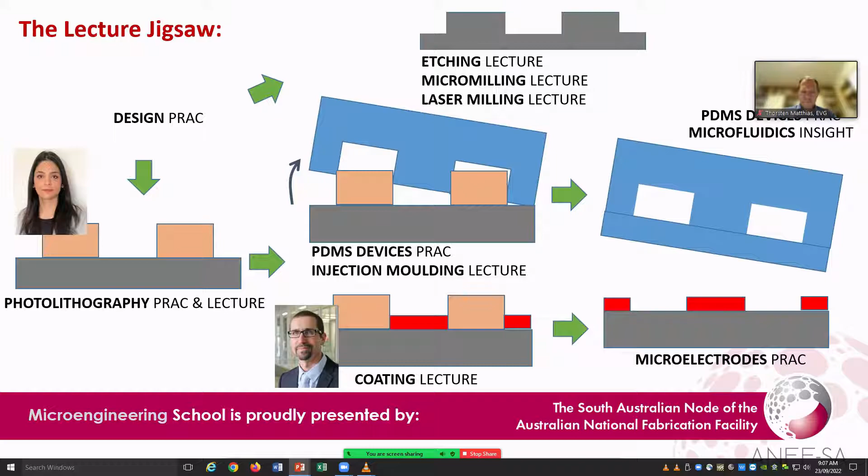Just to remind you of our little jigsaw here, you will have seen a few talks, and hopefully yesterday you took the time to dial in to watch the recordings that we've got. Colin has spoken to you about coating. We've had Mariam on photolithography, Donghoon on etching, Ben on laser milling. Now, micro milling you would have seen online, hopefully, a recording from Mark - some really nice work there. Please do check these out, these are fantastic, and Mike on injection moulding and moulding technology.

Then today, Coco and Berrak. So these are the lectures that you'll see, and of course the insights link all these things together in terms of devices. So by the end of this week you should have a rough idea what steps you could put together to make a small device. These are our volunteers - just thanking them all again, and back to the sponsors.

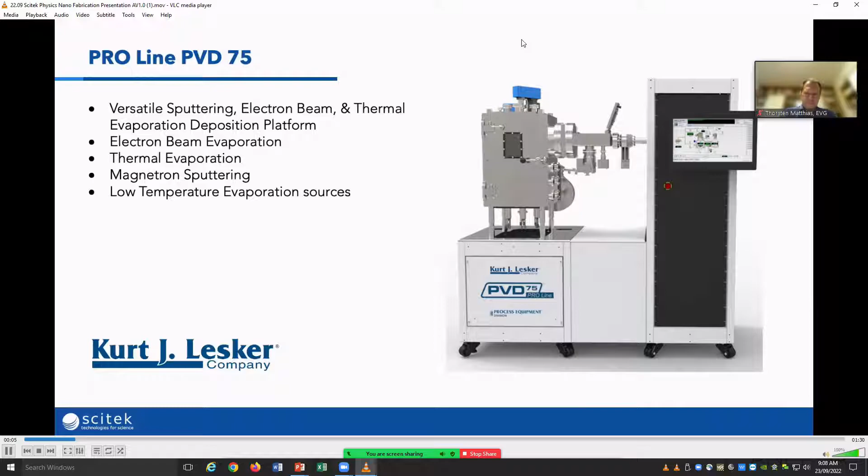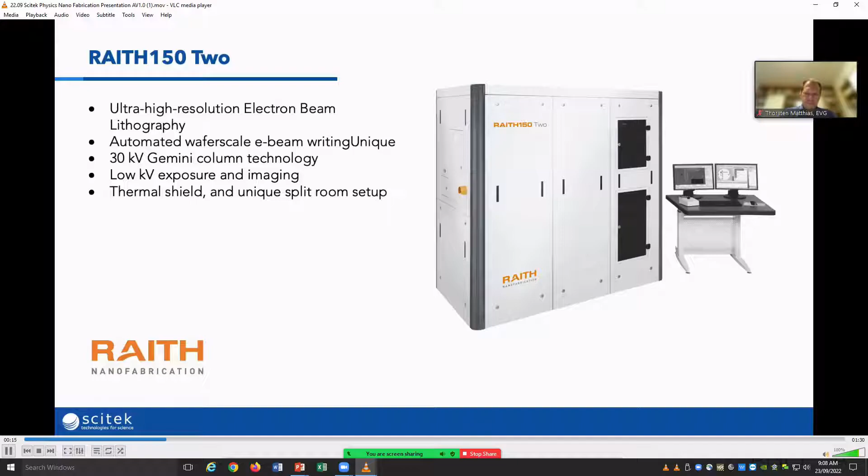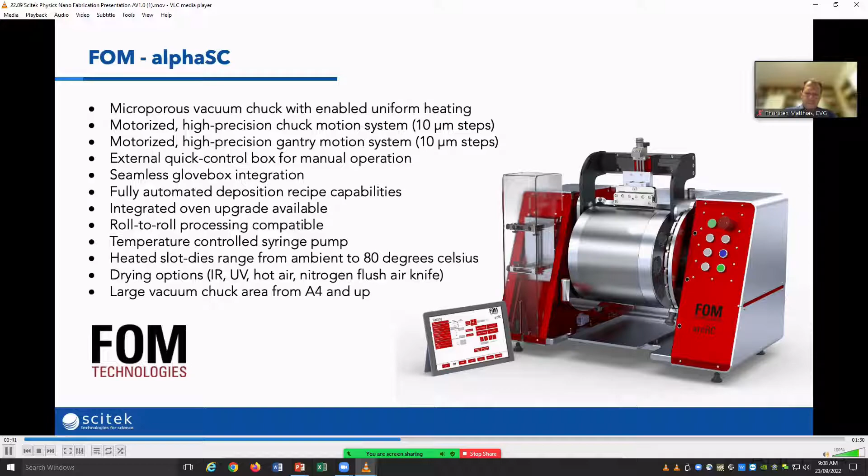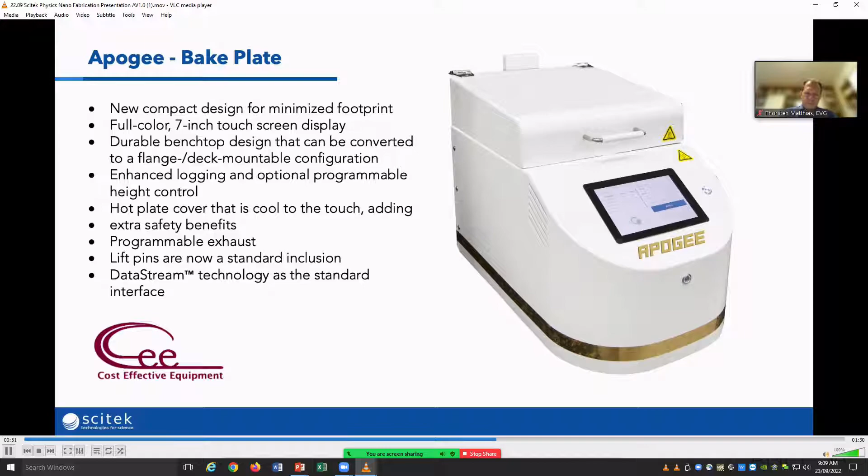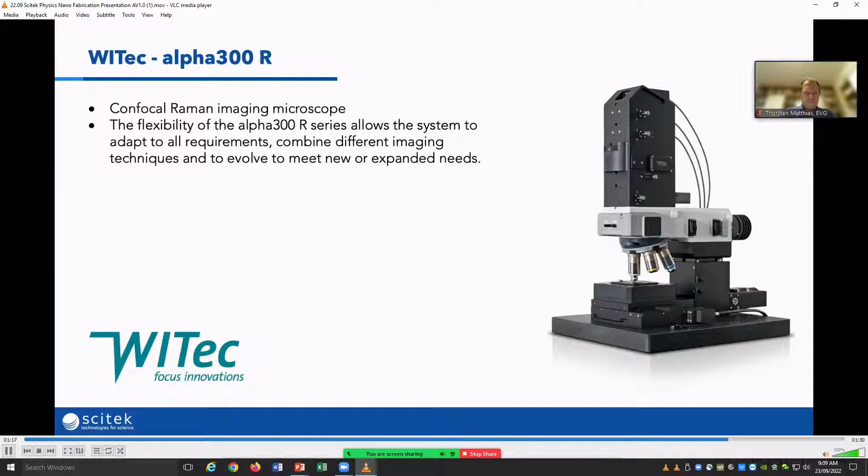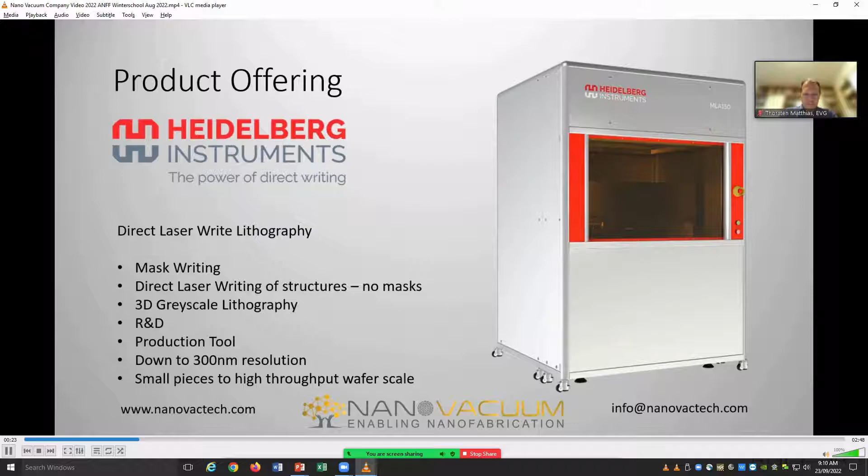So you saw just before there a maskless lithography system. We've purchased one of those for the South Australian node. It will come middle of next year - it takes a while to get these tools in because they're very complex and are made bespoke.

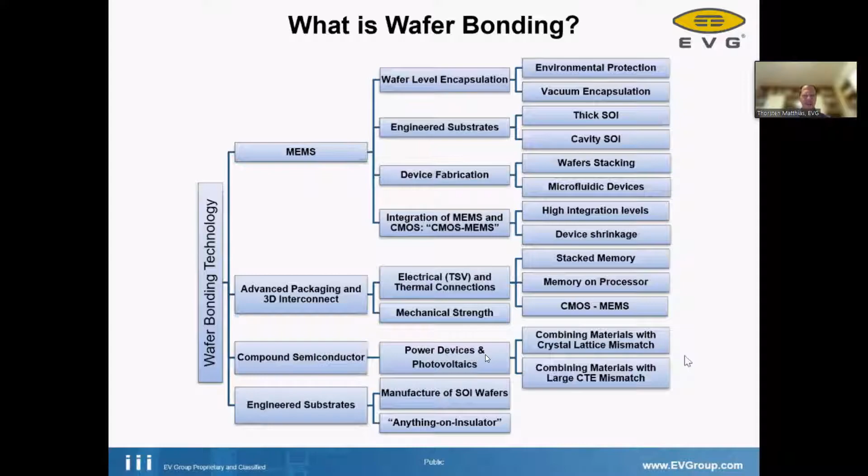Now if you go one step deeper, looking at the different techniques for how wafer bonding can be applied, very broadly we differentiate between two ways to establish the bonding process. One is where we actually use the physical and chemical properties of the opposing or mating surfaces, which we call direct bonding - where we basically use solid-state interfaces and create a chemical bonding, ultimately a covalent bonding, between two surfaces.

Or I can use basically a glue. And when I say glue, this could be a glue as you think about it, can be a polymer, but it could also be kind of a metallic glue, or basically using metal layers, either melting metal layers or solid metal layers as my interface. Or I could use what we have here with the glass frit bonding, basically a glass type paste in order to establish the mechanical connection between my two wafers.

And then in the course of my talk, I will discuss some of these technologies here in more detail.

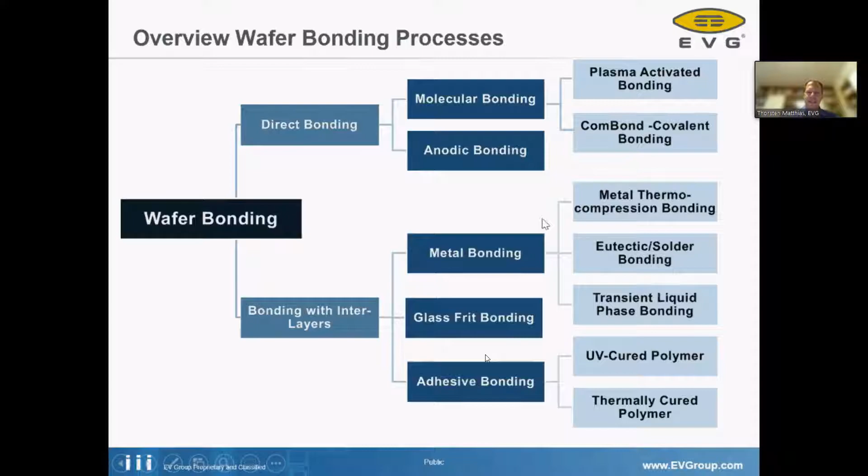Okay, let's start with the very first one, which would be the adhesive bonding. You can think about there are a lot of thermally curing adhesives, and thermally curing adhesives have the advantage that they basically work with all kinds of materials, all kinds of wafers. But it requires that you have a process step at an elevated temperature, maybe 80 degrees, 100 degrees, or even higher. So your wafers, your device, or your substrate has to be able to withstand the temperature.

If this is not an option, then a UV curing adhesive might be a good alternative. However, you have the limitation that in order to enable UV curing, one of the substrates has to be a glass wafer. And very often the challenge is we want to create a cavity, as you see here.

I can create directly out of my adhesive the sidewall, so an entire sidewall is my adhesive, or I create a sidewall with micro machining on one wafer, and I have a full layer adhesive film on the other wafer. I might also apply spray coating techniques, where I can conformally coat the micro machine surface, or I can apply a technique where I selectively deposit adhesive on my already established seal rings or sidewalls of my cavity.

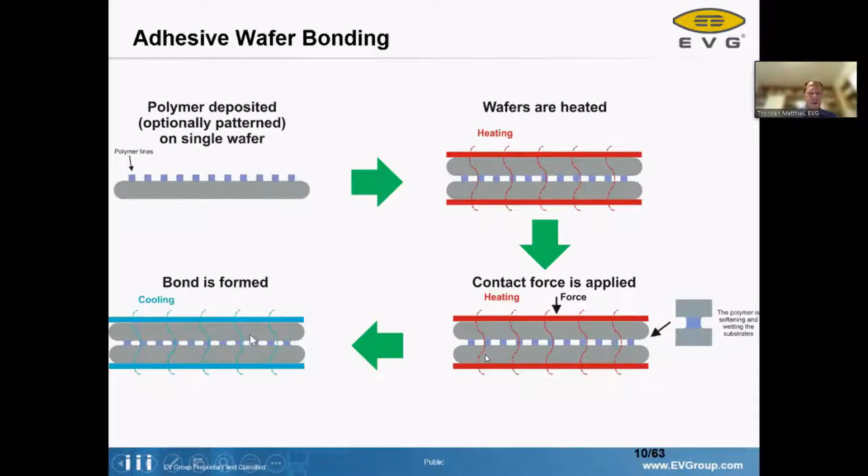Okay, and now I would like to give you a real-world example on why would I want to create some micro-machined cavities with a defined pressure or vacuum. So as a starter slide, I have here a couple of applications where this wafer bonding is actually being used.

It's actually something for a lot of micro-machined parts. Wafer bonding is a step - so everybody of you in your cell phone, there are multiple devices which are being packaged, which are being created by using the wafer bonding. Examples would be the RF filter, like FBARs, or the inertial sensors.

Like accelerometers, gyroscopes. In some cases you might have a magnetometer. Pressure sensors, very important for the safety devices in your car. You might create some more esoteric devices like atomic clocks, oscillators, and last but not least, this might also be used in order to make a thermal imager, a so-called bolometer.

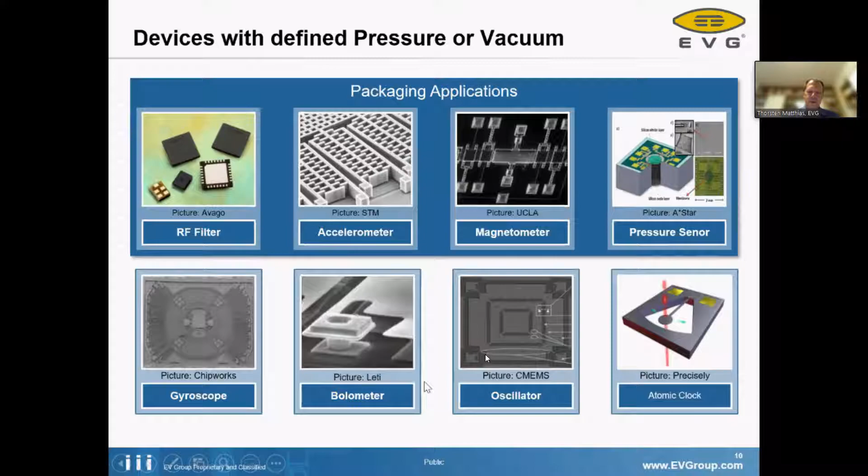These optics are typically integrated into your top wafer, and then above you might have, most likely, some lens system, some beam shaping system. But basically with the wafer bonding, we create a cavity, and in the cavity you have individual pixels. And then on your bottom wafer, the bottom wafer is most likely created by a structured microelectronic system created by CMOS.

In order to read out the signals from our individual pixels, the measurement principle is strikingly simple. Each pixel is in very high vacuum. If a photon hits your pixel, it starts to heat up, and as we have semiconductors, we can measure the change in resistance. That's basically our measurement principle: a photon hits a pixel, gets absorbed, it heats up, increases the temperature and resistance, and we have a signal we can detect, allowing us to create an image based on the thermal radiation of our object.

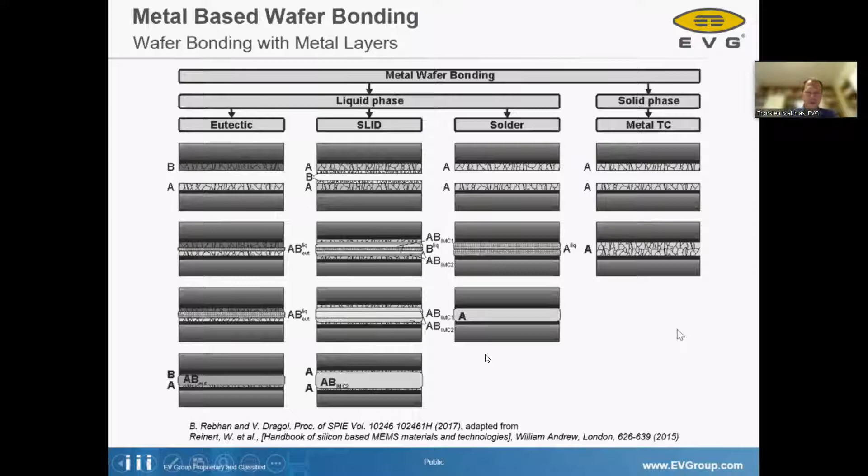This involves dealing very frequently with real eutectic compositions, where you have two wafers with different alloys and an alloying process. Solid liquid interdiffusion is a kind of subset of eutectic bonding, which I'll address in a bit. All kinds of soldering are possible, and there's also the possibility of diffusion-based thermocompression bonding. I'll go into more detail about these technologies in the next couple of minutes.

So let's start with thermocompression bonding. The idea of thermocompression bonding is basically that I use one material, or it could be an alloy, with the same material on both sides of my wafer, and I want to create a solid permanent contact.

Basically the key mechanism, what we're talking about: when you bring two metal surfaces into contact, you will always have some kind of diffusion between the two surfaces, but you have to ensure that the surfaces are really, really close to each other in order to have metal ion diffusion of any reasonable rate.

The materials we are talking about, most common is gold-gold bonding. For example, for RF filters, gold-gold bonding is being used, probably in all of your cell phones - you have some RF filters with gold-gold bonding involved. Aluminum, I will address in a little bit in detail. It could also be used, or copper bonding to copper bonding.

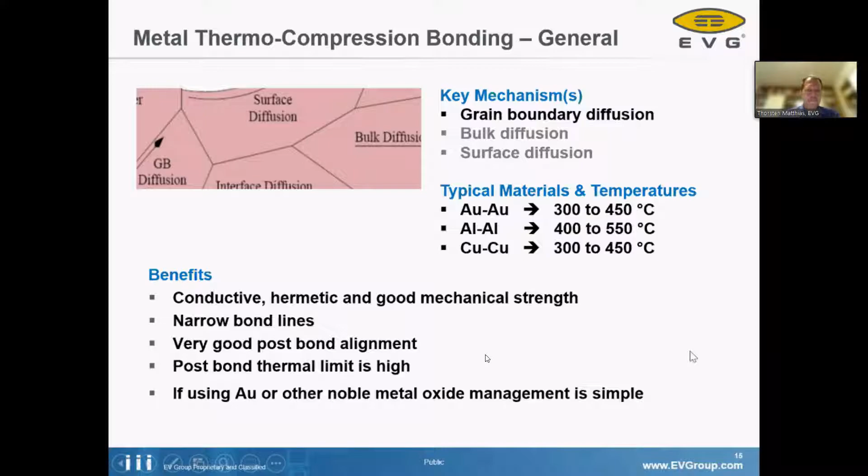Let's take a look in a little bit more detail. So here, these two on the left side - I have these two golden rectangles here that should symbolize my gold interfaces, or let's say in this case probably more copper interfaces. But in a lot of cases, except when you're using gold, you have to deal with this on your metal - you will have some oxides. Oxides are forming in a lot of cases very rapidly.

So in reality, you will always have to think about, if you develop a process flow to make such a device, think about if there's an oxide, how can you get rid of it, and how can you get rid of the oxide during the bonding process or very shortly before bonding.

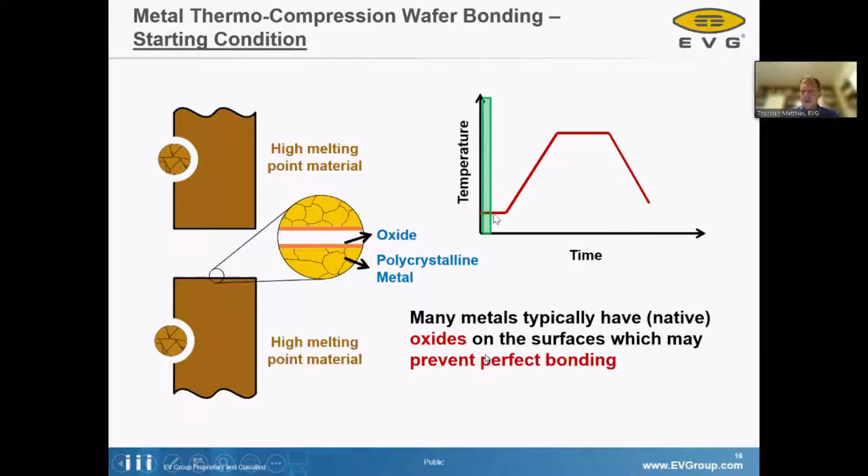In the case of wafer bonding, typically we flush the surfaces with reactive gas, like forming gas, or you might have a formic acid bubbler in order to reduce the surfaces and get rid of the oxides. This happens at a starting point of the process, might be room temperature or slightly elevated.

Ideally, we are successful - we create oxide-free surfaces, and then we can bring the surfaces into contact, and then we start actually heating up, starting the bonding process and then increasing the temperature.

Now an important point here is we need, for metal thermocompression bonding, very, very flat surfaces. So the wafer bonders can technically go to very high, apply reasonably high pressure in order that the materials can overcome a little bit - we can flatten out the surfaces a little bit, but the higher your density of your seal rings or so, it becomes very difficult to overcome.

If you have a gap in the interface, then basically you have a permeation path, a penetration path for gases, for moisture, and you will run into issues with the sealing quality, right?

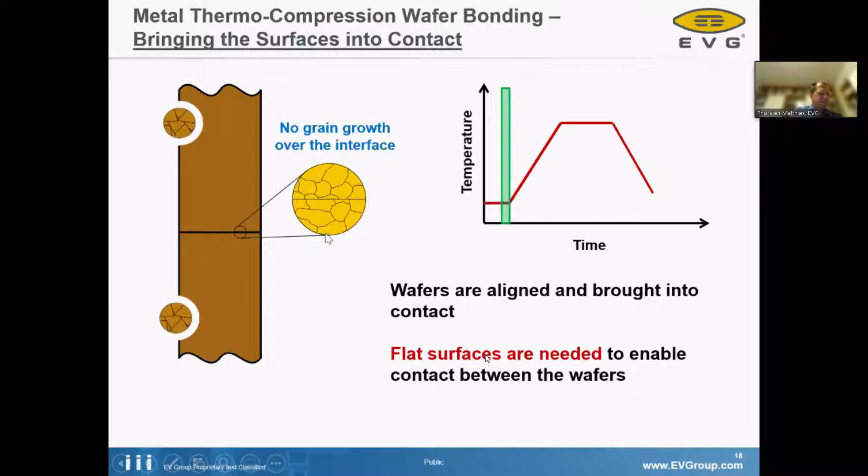Okay, so yeah, once we start heating up, basically we start to see metal ion diffusion. Typically the diffusion path is across our grain boundaries, which is kind of the diffusion highway in a metal system.

And the engineers typically use this as a means to assess whether the bonding has been good, whether there has been a reasonable enough material transfer from one surface to another, if we actually start to see grain boundary growth across the bonding interface - meaning if you do an interface cross-section, you would not see this line of the bond interface at all anymore.

This would be your way to determine that you basically have a void-free bonding, that you have a mechanical and also a stable and hermetically sealed ring on your device.

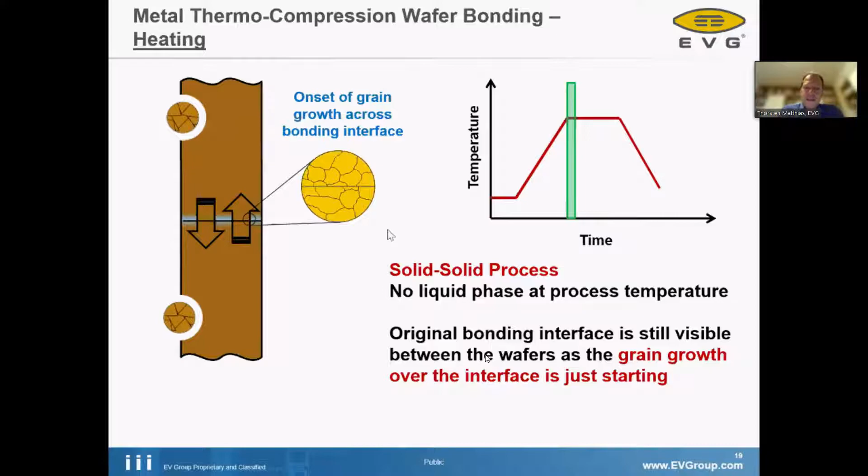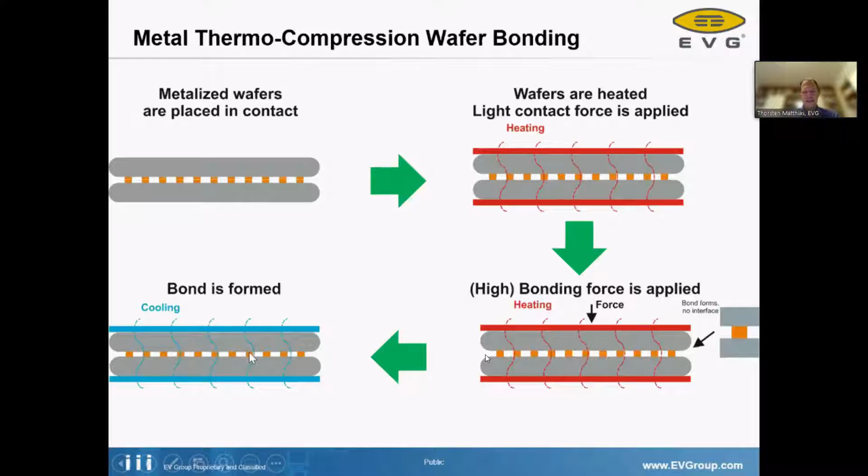Okay, so here I have again my kind of cartoons. I bring my two wafers in contact. Typically, in the wafer bonder, I still have to apply some flushing with oxide removal, forming gas or something, to treat the oxide removal. Then I bring my surfaces into contact, I heat them up, and I typically apply a very high bond force. Thermocompression bonding is not the fastest process in the world, so typically we are looking at something like 20-30 minutes bonding process time, or even more. And then finally I cool it, and I have my nice cavities and very good metal-based seal rings.

What this means is that during the bonding process, you start with solid metal surfaces on both sides, but during the bonding you have a short period of time where you create a liquid phase, a liquid metal film, liquid metal phase in your bond interface. If you have a liquid phase, it becomes a lot easier to close all the gaps, to fill all the trenches or crevices you have on your wafer, in order to create a very nice hermetic seal.

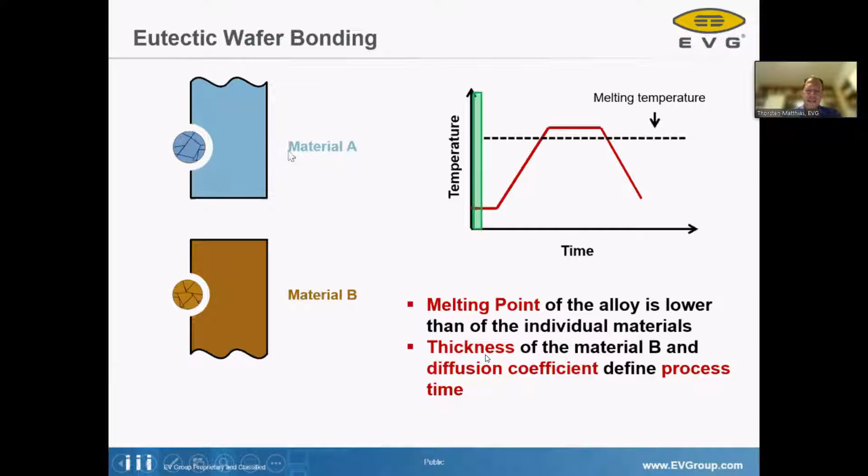So here we see again, I use the same kind of cartoon style demonstration for the bonding process. Let's assume I have a binary alloy, material A, material B. I bring the two materials into contact. At this point, I have two solid interfaces. But then during the heat up, I already see some kind of diffusion, metal ion diffusion.

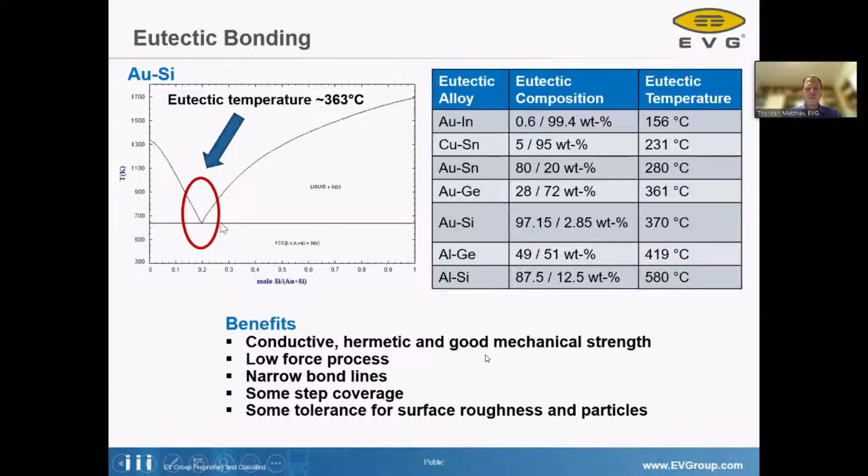And what happens is, as I have this metal ion diffusion, let's jump back - I'm actually moving in my phase diagram from both sides towards a stoichiometric composition where I have the lower liquidus point. So what happens is, at some point when I have had enough of this metal ion diffusion - here we basically see the temperature curve in the bonder - my entire system is at a temperature higher than my eutectic point. Then I start to see some liquid interface, and all my voids, gaps between my seal rings are being closed just by the properties of having a liquid in the interface.

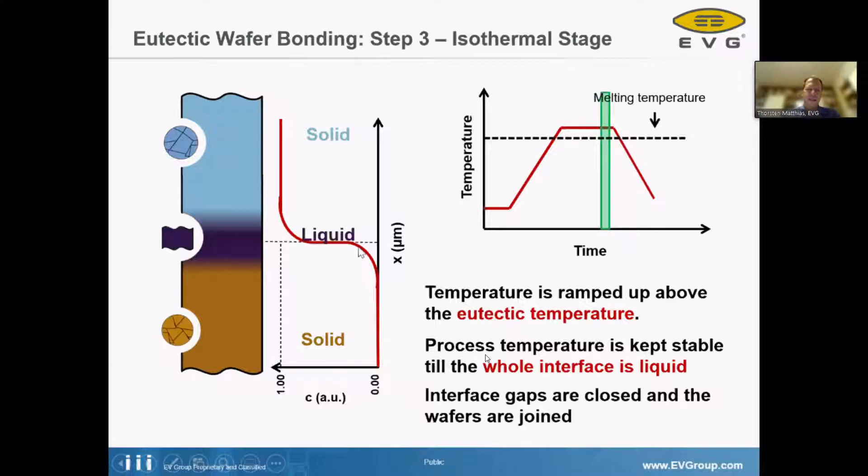And then I have to cool down. In this case, the cooling down has to be very accurate, because cooling down a liquid, if this would not be homogeneous across the entire wafer, it would be very easy to integrate some stress into your device. Especially for a lot of MEMS devices, if you already create stress by the package, then you probably already create some drift in your sensor. So cooling, especially the very first part going from the liquid phase to the solid phase, is very important for eutectic wafer bonding - you do it very, very controlled.

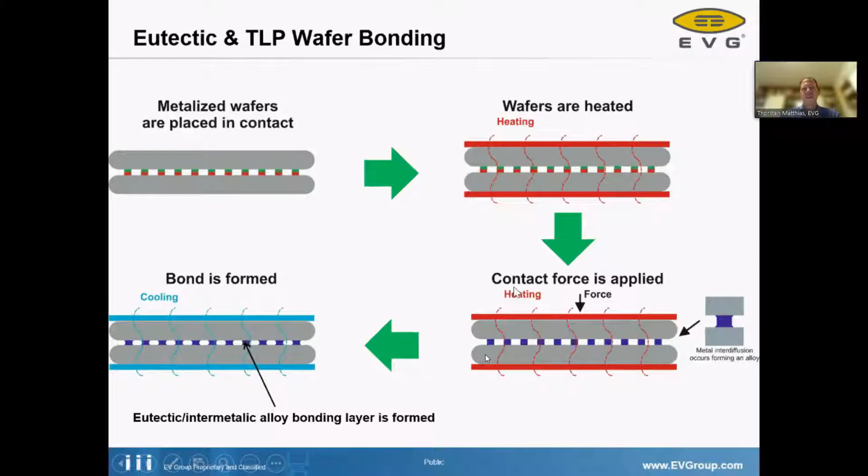Okay, the symbolization is very similar to what we have seen for the metal thermocompression bonding, but the main difference is, in this case, during the bond process, I go shortly through a metal liquid phase, which means with eutectic bonding it's a lot easier to deal with gaps in your interface. In other words, with metal thermocompression bonding, you have to take a lot more effort in order to avoid having gaps in the interface prior to the bond.

Okay, and then another very important process in the world of microelectromechanical systems, or MEMS devices, is anodic bonding. Anodic bonding relies on the property of a glass wafer, or actually it could be a deposited glass film on any kind of wafer.

These are specific types of glasses. Typically, they have a very high metal ion content, metal ions of the alkali group. What basically happens is I bring my two wafers into contact, and go to a very high temperature, typically in the range of 350 to 400 degrees C. At this temperature, I will see a thermal dissociation between my

metal oxides in the glass. And now I apply a fairly high electric potential here through the interface. What happens here is basically I draw my oxide ions into the interface, and I have some kind of internal deposition of the oxide ions there. I grow an oxide layer between my glass wafer and my silicon wafer, and I form a very strong bond.

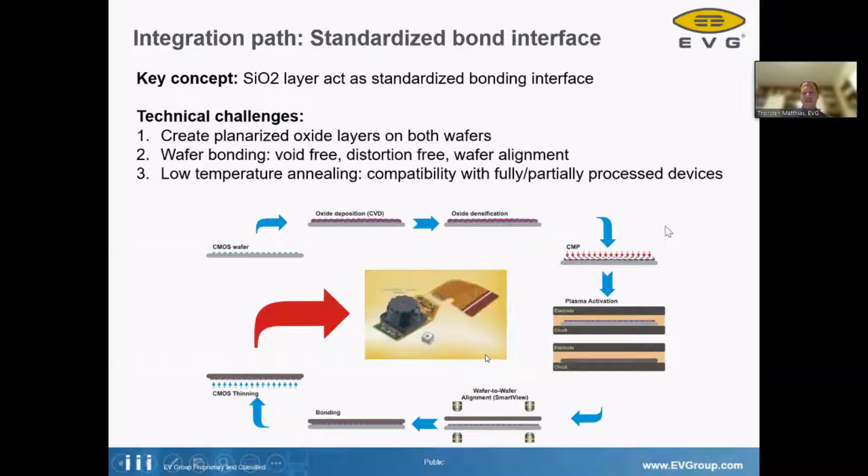So technically speaking, if I can create oxide layers and planarize them on both wafers, then I can use this fusion bonding in order to bond any kind of wafers, any kind of devices, and connect them permanently.

Just some trivia: this fusion bonding was first described by Galileo Galilei nearly 400 years ago. You probably know this phenomenon - if you have two microscope sliders with a droplet of water in between and you press them together, it's very difficult to pull them apart. This force you are feeling is already an example of fusion bonding.

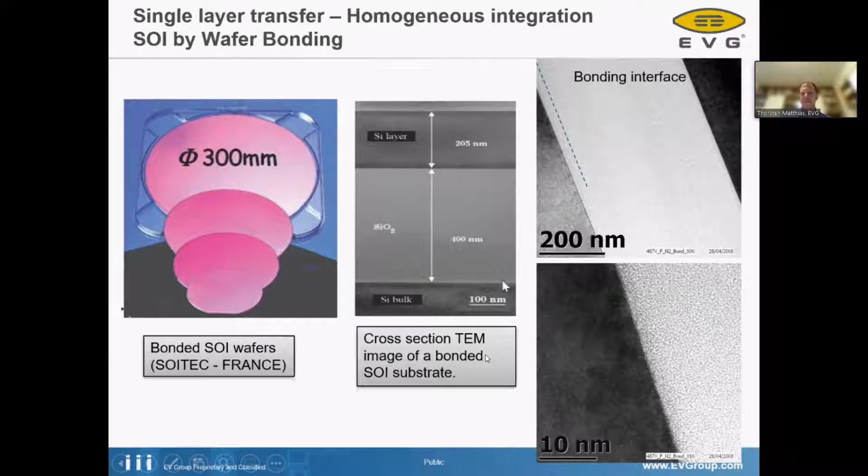In the microelectronics world, this process has been used for many years. For example, all these so-called silicon-on-insulator wafers, where a lot of today's devices are created, start with the wafer bonding, fusion bonding process in wafer manufacturing.

So here's how wafer bonding, or fusion bonding, is applied in a bit more detail. I have my two wafers, and I have to ensure really super clean surfaces - any particle in the interface will create a large defect. So this is really a semiconductor fab process with front-end cleanliness required. Then there's a plasma activation step, and then finally the bonding, which actually happens at room temperature.

We have a so-called plasma activation, which means we are disturbing the crystallographic structure of our interfaces - we are enhancing the entropy in my system. Then with a very moderate annealing temperature, I can start a recrystallization or reorientation of the crystal lattices of my oxide layers, and I basically get a gap filling. With fusion bonding, we are able to achieve bond interfaces without any gaps, without any voids.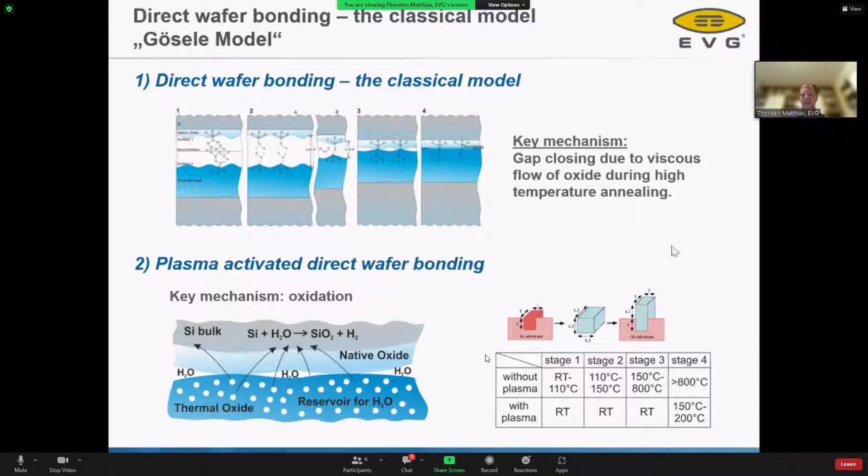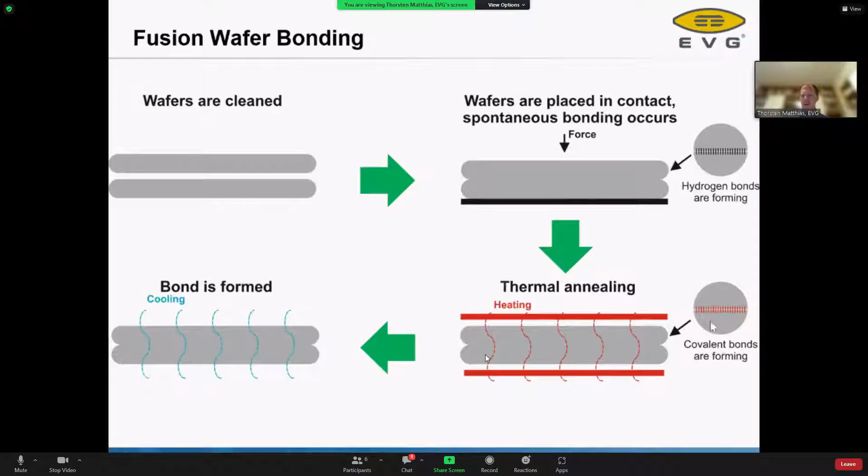So the bonding itself happens at room temperature. Initially I create some hydrogen bridge bonding, but during the annealing process this is transferred into a full-area covalent bond between the two wafers.

For those of you interested in microelectronics, if you look at the roadmaps of the next generation of transistors, you will see that in a couple of years, for the leading edge transistors, we will see more integration of different semiconductor materials into the transistors. Then probably in roughly 10 years or so, a transfer of 2D materials like graphene, also used for transistors. This transfer of 2D materials would also apply a wafer bonding process.

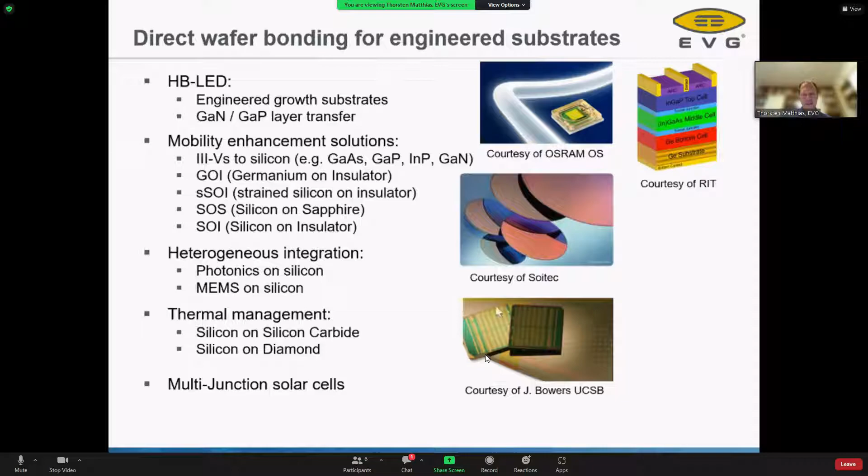On this slide, I just have wafer bonding being used for a lot of things. A lot of your electronic components of your cell phone use it today, and it's actually quite a versatile method. So to summarize...

It's established very well in high volume manufacturing. So thousands of bonds every hour around the world, either for encapsulation of a cavity or for integration for the permanent connection on the micro level of two or more different devices.

And in the lecture today, I wanted to give you a little bit of an overview of how the basics of the engineering are applied here for microsystem engineering, where we have the chemistry and the physics of the adhesive bonding, all the metallurgical and alloying processes, but also here the fusion bonding.

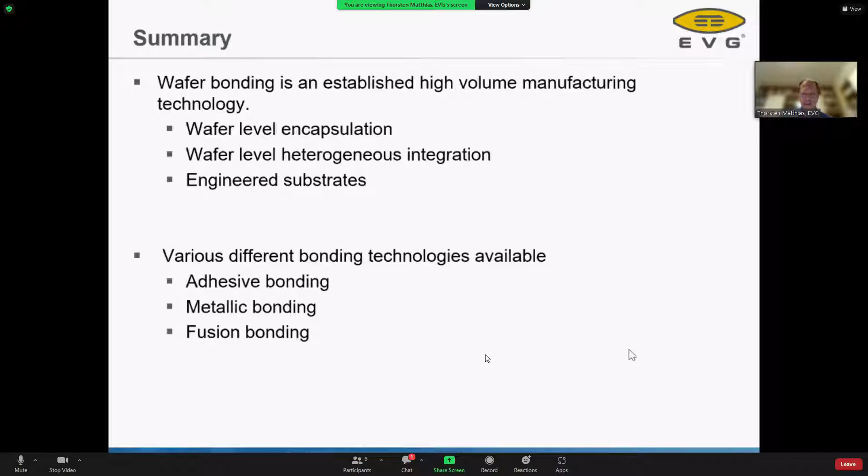It was an amazing journey through all the different, well, not all the different, but some of the key bonding techniques. I just say to the audience here that bonding is a lot more than just sticky tape and super glue. What you've seen there is really critical to being able to actually make devices rather than things that fall apart in application, and you simply don't often have devices without these capabilities.

Bonding can be extremely challenging. It's not a trivial part of fabrication, and so getting a talk like this from Thorsten, we're really privileged, Thorsten, to have your knowledge coming to the school like this. My pleasure, my honor. And again, thank you for staying up late to be able to do it for us.

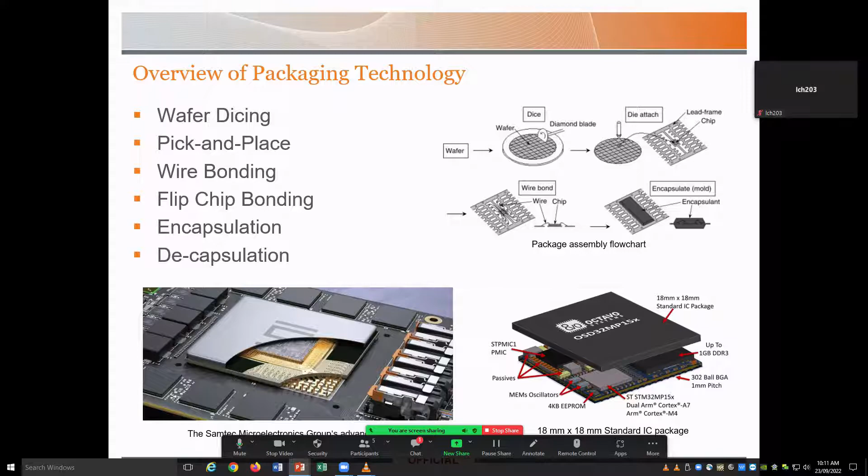Okay, thank you, Berrak. So as Berrak said, when you have a wafer, during the winter school you've learnt a lot about the processes involved with making devices—photolithography, etching, deposition, and also wafer bonding. These are all the processes that make up your final device.

And as Berrak said, the start of the final steps with packaging starts with dicing. You have potentially hundreds of devices on one wafer, and we need to separate these out, so we do that by dicing. There are a few different methods of dicing, depending on what your wafer material is made of and how dense the actual devices are on that wafer.

So a couple of the common methods are listed here. You should have already learnt about laser ablation and laser milling in Dr. Ben Johnson's lecture on Wednesday, so I'm not going to go over that. But I will talk about blade dicing, which is very common, and I'll also briefly talk about stealth dicing.

So blade dicing is a common technique, especially for smaller research scale applications. This is what we use at DSTG, and also what is used at ANFF-SA at UniSA. In the blade dicing method, a diamond impregnated blade is used, very similar to a circular saw, to dice up your wafer into individual die.

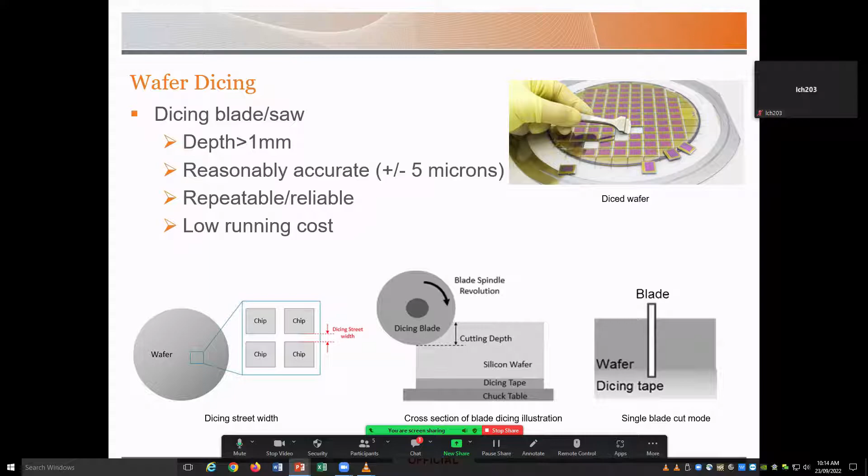So I'm going to talk a little bit now about the optimization of the actual dicing process. Obviously our number one objective when we are dicing is to cut nice and straight so we get really nice dies with minimum chipping and no heat damage. Secondary to that, we also want to protect our blade so that we can use it over and over again and reduce the running cost of the machine.

As I mentioned, this is a physical technique using a diamond impregnated blade, so there's a lot of frictional heat generated in this process. This means that there has to be a water jet running which is directed at the interface of the blade and the wafer at all times, and this also helps with the removal of any debris generated during dicing. So there are a few things we have to consider to optimise this process, and the properties of the blade that we choose will depend on the material being cut.

So, and also the patterning of the devices on that wafer. The thickness of our wafer is going to determine the diameter of the blade that we need to use, and the street width is going to determine the width of the blade that we need to use.

Generally, you need to account for your kerf width being double the width of your blade, and your street width needs to be a little bit wider than that to account for any chipping. If you choose your parameters correctly, chipping should be kept to an absolute minimum.

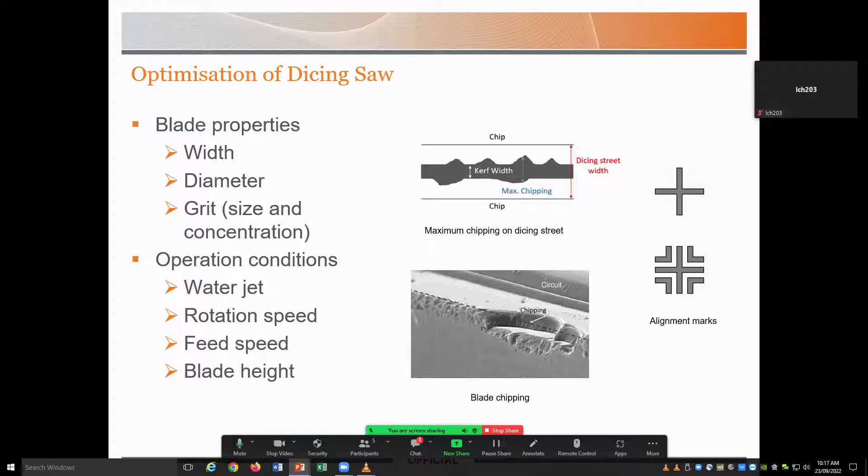This is also really crucial for dicing, as it helps us make sure that the cuts are being made in the centre of the street and we're not going to encroach on the circuit, even if there is a small amount of chipping. So the better your alignment marks are in your photolithography and design steps, it's also going to help you get a really good result when you're dicing. So that's something to keep in mind, as that procedure continues on.

This is really good because there's no heat damage here. It's also a lot faster than blade dicing, but it is extremely expensive. So for a commercial application, this would be more common than blade dicing, but not what we use on a small scale.

I'll pass over to Berrak. Thanks, Coco, for dicing the wafer for me.

So, from our experience, we used to pick these individual dies manually. However, this process can be very challenging because the dies are very small, and also it can be time consuming because these dies are really stuck onto the dicing tape, and we can physically damage these chips. And also, while you're taking this out, from our experience again, you can lose these chips. They can flake and go on the laboratory floor anyway.

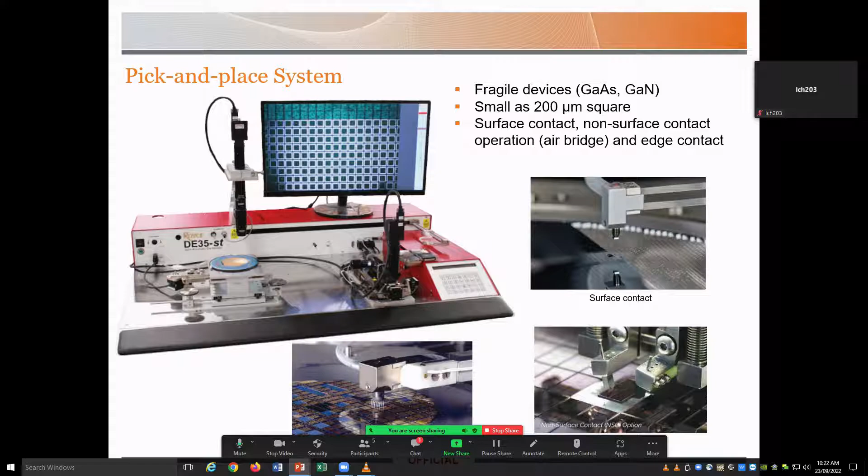So we have our individual die, and now we've got our printed circuit board or any desired substrate, and we need to place our individual die on top of the substrate. How do we do it? We place either conductive or non-conductive epoxy, drop off the epoxy on the substrate, then place the die carefully on top of it, and put this in the oven to cure it. We follow the instructions on the data sheet, depending on the epoxy we are using.

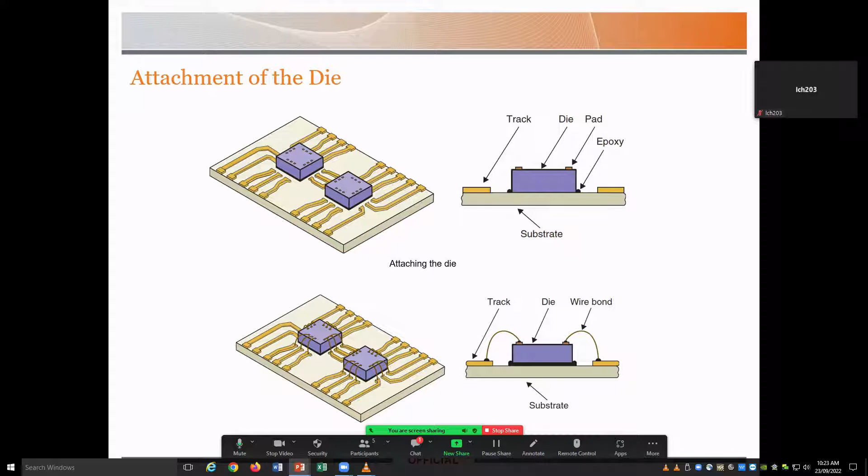So the next step: we cured our die on the substrate, and it's physically attached. Then we need to make sure there's an electrical connection from our chip to the terminals. The most common technique is wire bonding. Wire bonding is a standard interconnection technique that enables electrical connections from microchips to the terminals, and it's categorized by the bonding method. The first technique I'll talk about is ball wedge bonding, generally called ball bonding.

So what happens here: in the first step, you have your capillary, and you feed your wire through the capillary. There's an electrical flame-off, an electrical spark, and it creates a free air ball, as you can see in the second step. This melts the wire, and due to surface tension, creates this free air ball. Then in the third step, the capillary moves toward the first target, creating your first bond with the ball shape on the first target.

The bonding equipment then starts moving toward the second target, creating a loop shape. I forgot to mention the third step: you apply ultrasonic energy and heat as your forces, creating this first ball. Then for the second bond, under the same forces, you create your second bond, and while the clamp closes, the bonding tool goes upward, creating your wedge bond, and leaves the tip for your wire for the next bond.

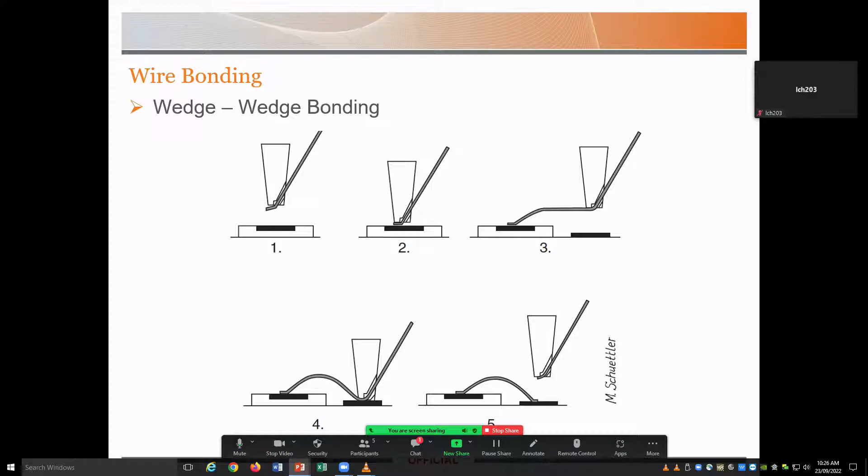So these two techniques have advantages and disadvantages. However, the bonding method is decided by your application. You can clearly see in this video how the ball bonding is created.

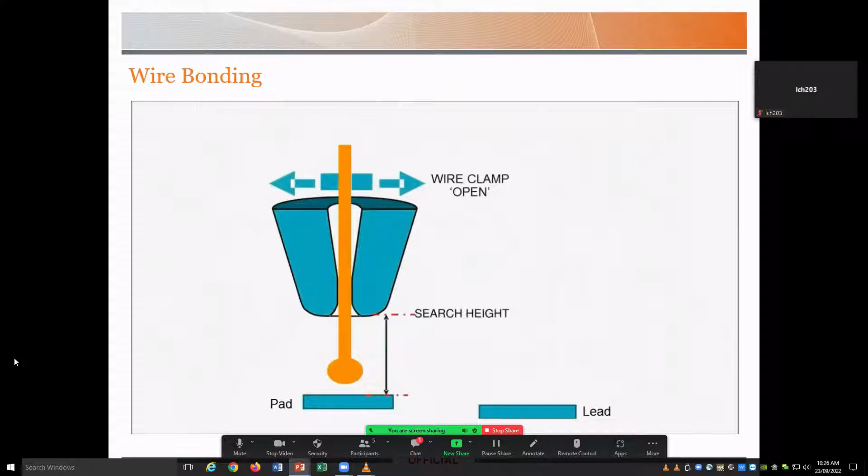Applying heat and ultrasonic energy creates the first bond, creates the loop, and the capillary is moving towards the second target.

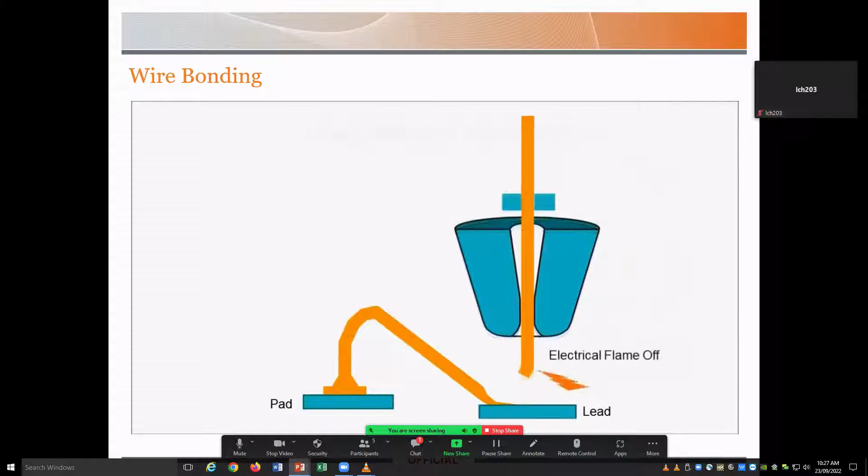And then we are about to create our second bond, under the heat and ultrasonic energy. And the clamp closes and tears the wire. And creates again - you can clearly see the electrical flame off - creates the ball for the next bond.

So these are the images of scanning electron microscopy techniques applied to capture these images. On the left-hand side you can see the ball bonding, and on the right-hand side you can see the wedge bonding close up.

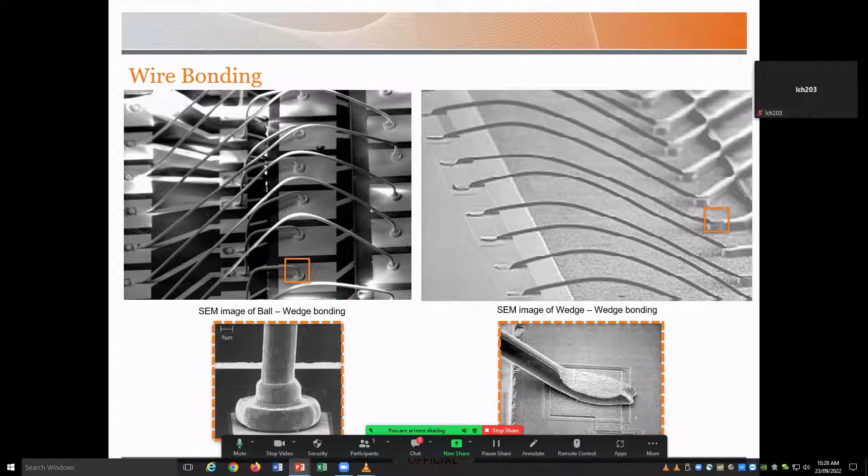And reverse bonding - so why do we need reverse bonding? In order to have a stable wire bond, in some circumstances we need to do reverse bonding. Generally, wire bonding is considered forward bonding. However, a chip like you can see in this image, a very high chip from the substrate, you might need to have control of the angle of your wire, and you might need a longer wire loop.

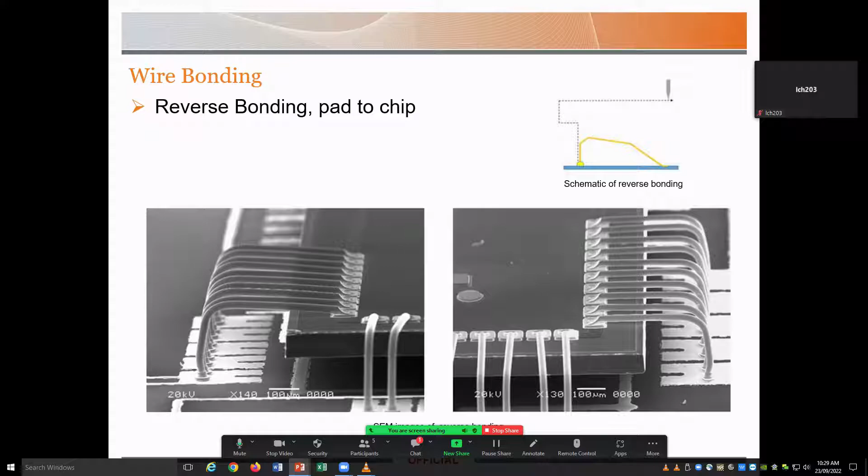So in this case, reverse bonding is required. In my experience, I had a similar chip, like a 1 millimeter high chip, and I tried to do forward bonding. However, the wire hit the edge of the chip, and this caused a break in the wire. So if we do reverse bonding, we have a stable wire bond.

So what do we have at DSTG as a wire bonder? We have manual wire bonders, and also automatic wire bonders. When I started at DSTG, we only had one of the 58 series F&S bonding machines. Now we have two of them, and we have changeable bond heads. This machine is capable of manual and automatic bonding, and you can do one wire per second.

And this might take a little bit of time, because when you say automatic wire bonder, it might sound straightforward. However, this programming takes a little while. But once it's programmed, you push one button, start, and it does the job.

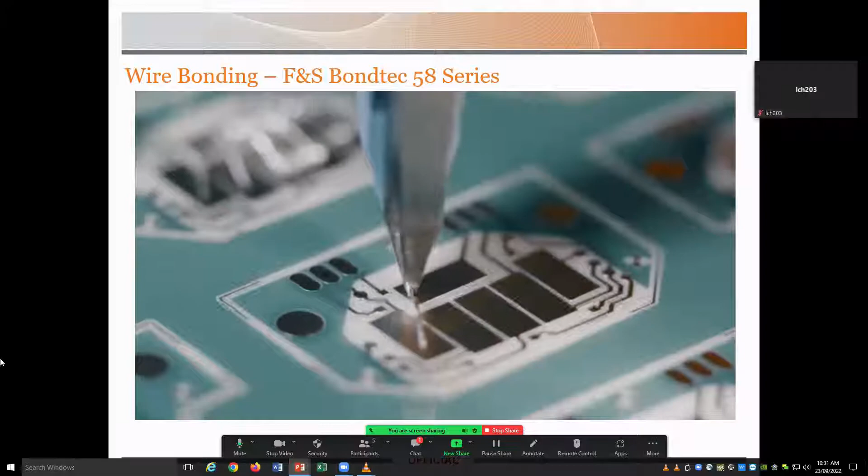So this is a video of our wire bonder. You can see this is wedge bonding with the aluminium wire.

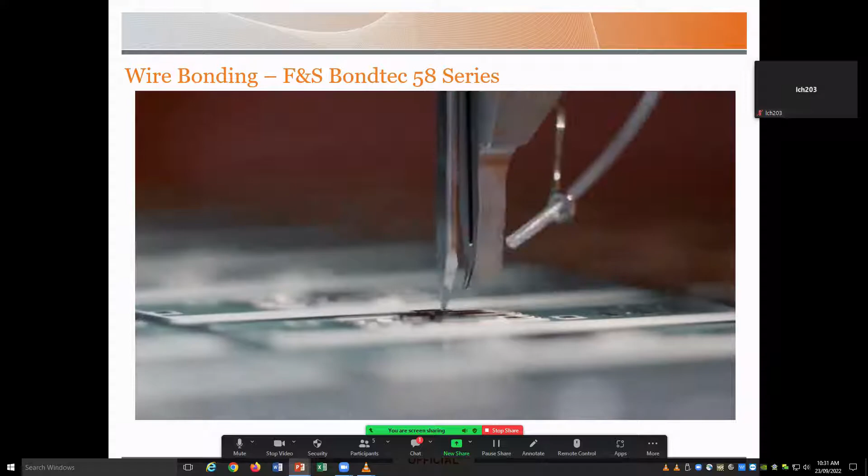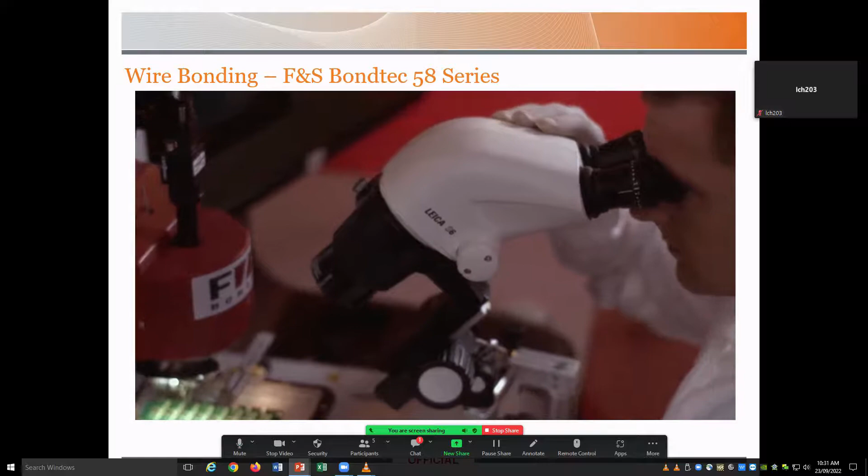So obviously this has been programmed, and you can see how quick this is after it's programmed. The bondable, changeable bond heads are very straightforward - you just need to calibrate after you change the bond head. You can either inspect through the microscope or through your monitor.

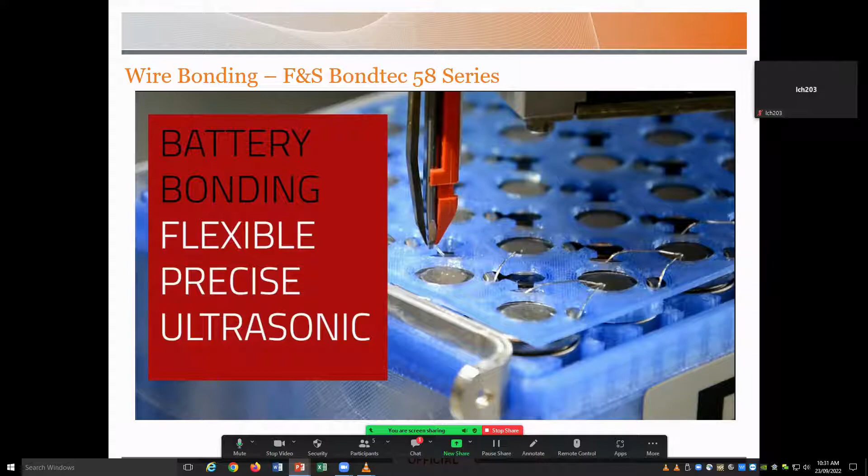And also, this is an example of some of the applications. We don't do it, but this is part of the F&S Bondtec, so you can do battery bonding.

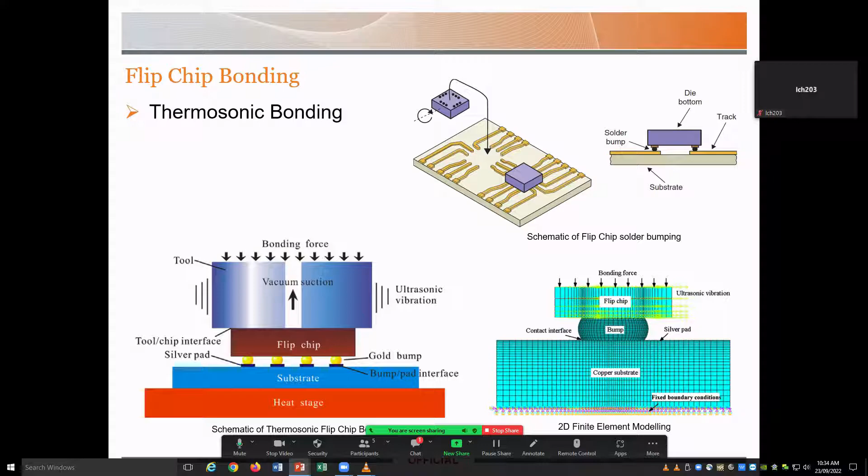So how do we test these wire bonds? Before going into testing methods, the more important part is the material. In ball bonding and wedge bonding, we use wires generally from 17 micron to 50 micron, depending on the application. Gold and aluminium wire are 25 micron diameter, and in the past copper wire has been used. So you have your design, your die, and depending on the fabrication process, you choose your wire materials.

Also the substrate, your printed circuit board, plays a role. The metallization of these printed circuit boards is crucial, because you need a reliable, stable, very strong bond from your chip to the printed circuit board. You have to consider this when designing or purchasing your PCB. Also the pad size is really important, because you don't want your bond size to be bigger than the pad size on the substrate or on your chip.

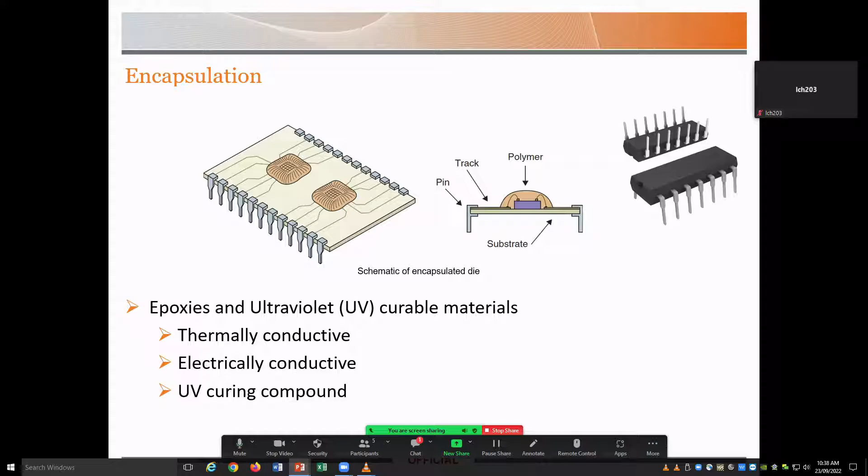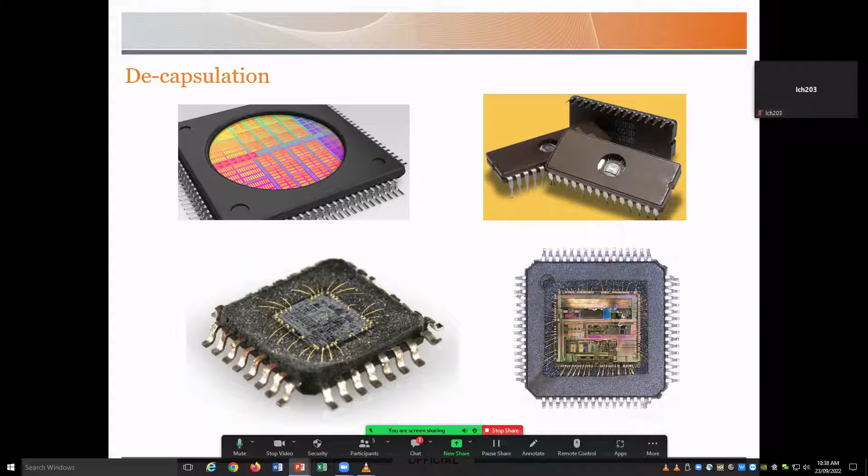The first step before we jet etch is to X-ray our package. This shows us the location and size of our chip within the package. We can also see some wire bonds if you look closely, especially with a high resolution X-ray. If you can see that some wire bonds are already broken, it means that during the jet etching process, you can actually just decapsulate a specific area and focus on where that failure has occurred.

With jet etching, we generally use two different types of acid depending on what polymer the package has been encapsulated with, that being fuming nitric and also sulfuric acid. We can program this machine to heat a specific volume of acid over a specific period of time to a specific temperature and expose our package to that acid, which will gradually react with the polymer surface and expose our die.

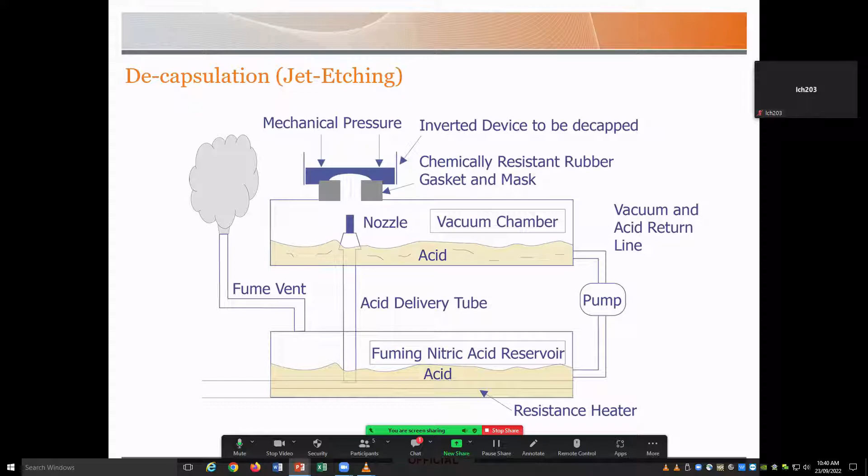Wonderful presentation, very interesting. I always think of it as therapy for microfabrication people to watch these wire bonds be placed so delicately and beautifully. Are there questions from Coco and Berrak? Let's see if we can get one question in, I know you'll want to go to morning tea.

What's the smallest die that you're currently working with from a research perspective? At the moment, the height is about 50 micron thickness for the smallest one, and generally 1 by 1 millimeter. So you need tweezers to handle it, and you must be careful not to scratch on top of it. That's the reason we purchased the pick and place system, so you can have control without damaging your chip compared to handling it with a tweezer.

Don't drink coffee or you'll have shaky hands. It ruins everything.

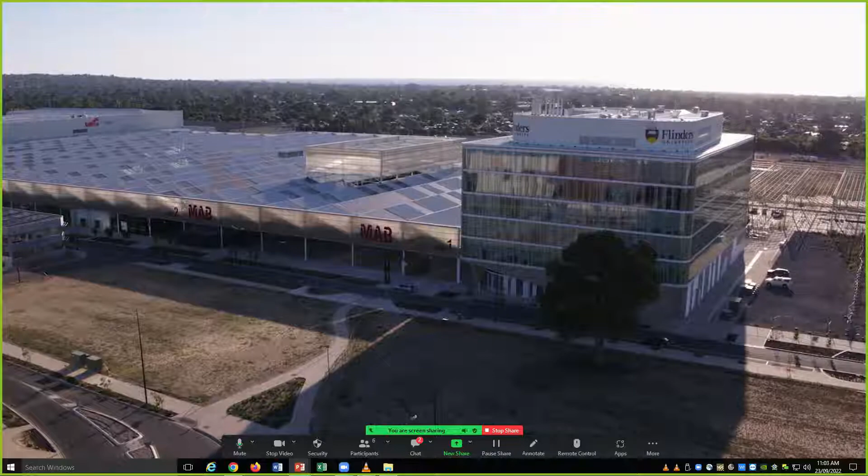So I'll play you a short video just as an intro, hopefully the sound works okay. Early stage innovation and technology development - it might be that someone just has a concept for a new medical device, or it might be that they've got an early stage prototype. The role that we play is connecting all of the pieces of the puzzle.

Currently, especially in breast cancer cases, they have no way of determining during the surgery whether or not they've removed the entire tumour. So effectively what happens is in between 15 and 20% of cases, the patient has to go in for a follow-up surgery.

Emotionally, it's something of a roller coaster. Because I had to have a second surgery, the time before I could start having chemotherapy and finally radiotherapy, both of those had to be delayed. And you know all through this that time is of the essence.

So the need that was identified was a tool that could actually be used in theatre to be able to measure whether or not the entire tumour had been removed. So what we had developed here was a probe that can actually look at the surface of the tissue. Simply by placing the probe in contact with the surface and doing a measurement, you can tell whether the place you're in contact with is healthy or cancerous.

The MDPP was involved in both developing some of the sampling hardware that we use. So they talked to some of the surgeons and some of the end users to try and develop this. What they gave to us was a prototype of the device, as well as doing some market research to see what sort of needs were out there, what the competing technologies were, and how our device fit into all of this.

So from a researcher's perspective, the best part of the MDPP is being able to really direct or provide some really critical insight to an idea or a theme.

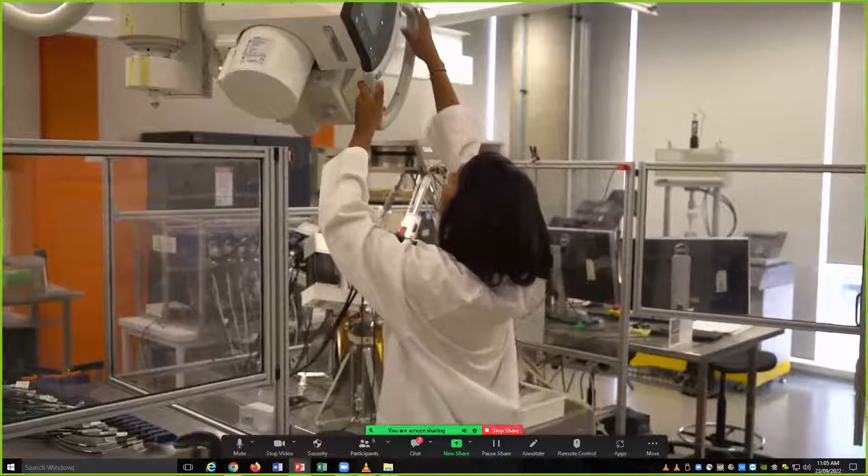It's even hard to describe how valuable that is to someone who's just got an idea and wants to move it forward. I was looking for ways of collaborating on these projects to try and commercialise some of the ideas I was having through my work as a registered nurse.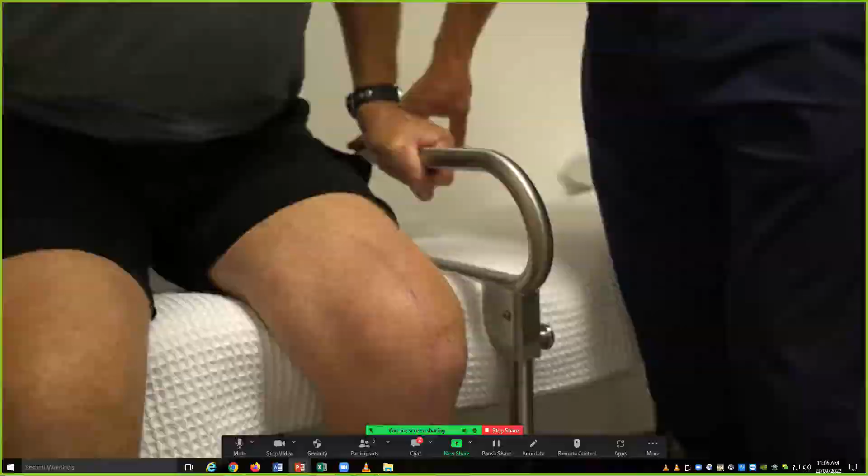We've needed 3D printing, engineering support—there's a lot of complexities. It also gave us access to academic staff, which we needed, because we were looking for proof of concept. So we sat down and they really critiqued the project to look at some of the things I hadn't considered, some of the commercial aspects, some of the manufacturing aspects.

And actually, it's not just research for research's sake, it's research that will help develop ideas, but ultimately help benefit patients. So it really is focused on improving clinical outcomes, improving quality and safety, and making something efficient and making something work.

It would have made such a difference to me and all the women I met while I was going through treatment to have had something like this that would have allowed us to just have one surgery. Just a few weeks can make an enormous difference. We just need as many tools in the toolkit to deal with cancer as we can possibly get.

The MDPP was able to provide market support research, which was critical to actually being able to get this device to the point that it's at the moment.

So that video is good just to give a bit of context on some of the people that we work with and to show that it's having real-world effects. And a lot of the people who do come are typically clinicians.

Really, MDPP's initial vision was to make Australia the fastest place in the world to take an idea for a medical device from the idea stage all the way through to having a product on the market.

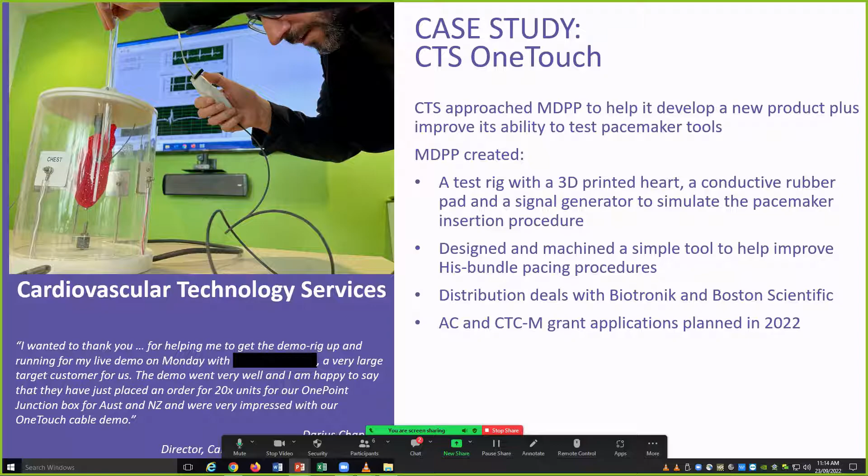So we developed a very simple device to address that issue, and also developed a rig that meant they could simulate that procedure. We used conductive rubber, simulating the ECG signal with a bullseye, so they had to get right in the right area to practice using it. That meant they could go demonstrate it to some of the large medtech companies around the world and apply for grants.

So I'll skip over some, but just quickly - Neomorph mouthguards. This was a dental hygienist who was fed up with having to pull mouthguards out of kids' mouths when they had braces. They'd be playing sport with cheap mouthguards that would get stuck, so she was constantly pulling them out. She was originally importing mouthguards, some with good qualities, some not so good, and had developed an idea of combining a few different technologies but had no idea what to do.

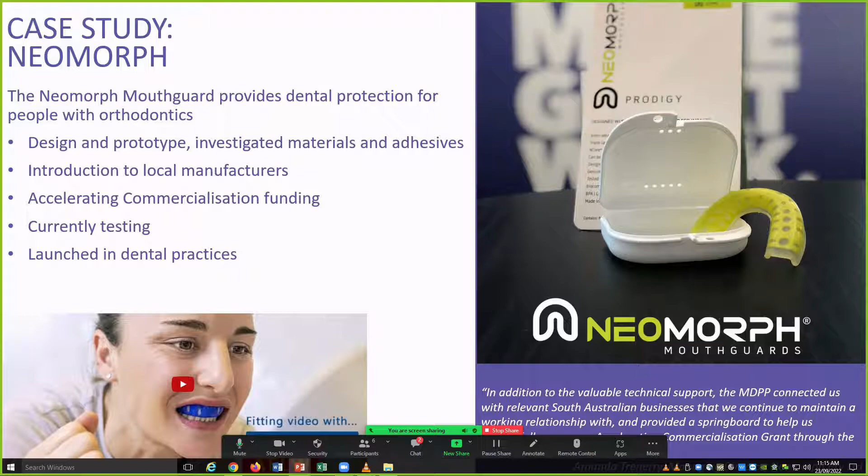She was a dental hygienist just selling these mouthguards when she came to us. Not only did we connect her with a material scientist to help develop the 3-layer polymer, but also gave her advice around commercialisation. She now manufactures these in Adelaide and sells them across the country, including to some AFLW players, as you can see in the bottom left.

Another one - this was for an orthopedics company, a product for helping to fix femoral nails. One of the issues they have is that they do lots of x-rays. The challenge is you can see where the proximal end, the end towards the hip where you put the nail in, is - that's very easy to spot and screw into the bone. The far end you have to use x-ray, and checking the orientation can be very difficult, using lots of x-rays and time in theatre.

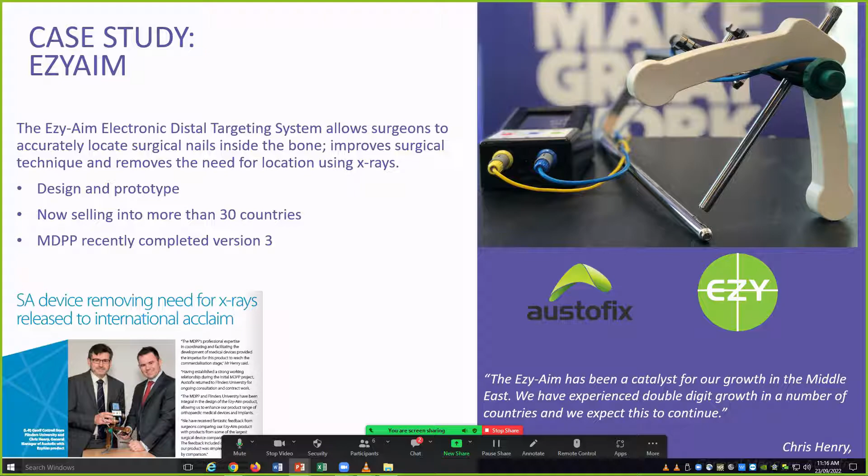With very expensive orthopaedic surgeons involved. So this device runs a current along the length of the nail and uses a couple of sensors to measure the positioning and guide the drill, saving lots of time. That's for sale in 30 countries around the world.

Finally, I don't think I'll get to my final part, but another example of a company we worked with - we did environmental test lab validation work for a company called Plasma Shield. They do air filtration using E-beam technology. Most filtration systems use a filter, which means you need more air conditioning units to pump more air through. This is a non-filter based system, so you can drop the number of units running, providing a cost saving to the ventilation company supplying the units, and it provides comparable decontamination.

Finally, I think this one's probably come up in previous presentations, but this was a good example. This was a UniSA project developing microfluidics, done at ANFF-SA in Mawson Lakes, to develop microfluidics that can measure a couple of biomarkers that are important in measuring preeclampsia.

Once they'd proven that the technology would work in around 4 patients compared to the current gold standard, they came to MDPP, and what we did was concurrently, at the same time as they were developing the sensor, develop the benchtop reader. As Craig mentioned, I'm a mechanical engineer, so I don't really understand the electronics, but I'm assured it's very complicated - the design requirements. Our electronics engineer is here today, so I'm sure he'd back that up. Difficult in terms of reading out that data.

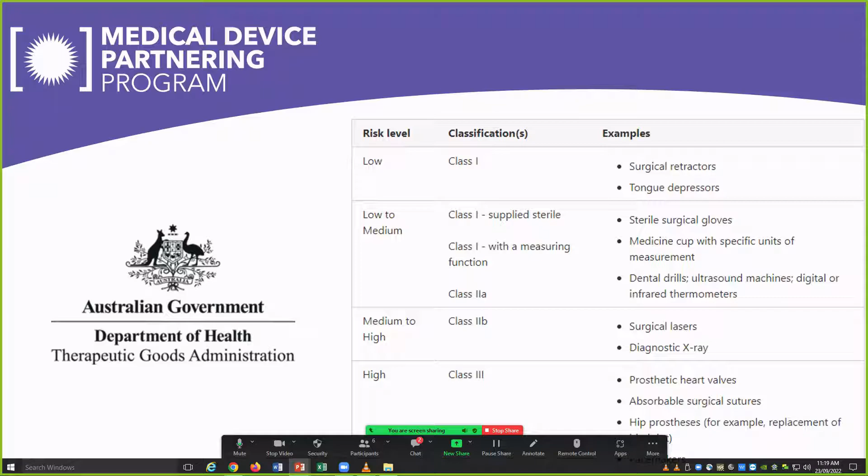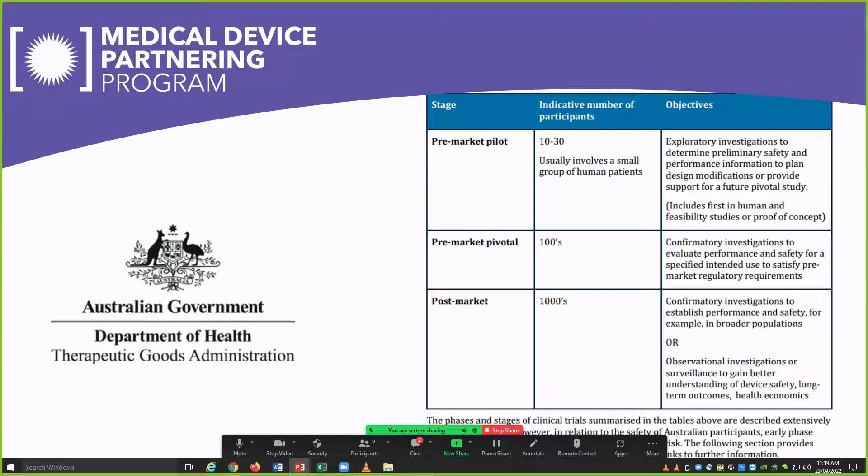And this is a big bottleneck for companies at the moment. I know we've seen a lot of talk recently about the pharmaceutical industry through COVID about the requirements for trials. Medical devices are a little bit different - we don't have the 3 phases in the same way, but we do have a pre-market pilot and a pre-market pivotal, and there's a lot of requirements for companies to have set up a quality management system in order to get to that. The problem was we don't have a lot of expertise in the country to do that.

We do have some companies that will take on legal responsibility for you, but then you're stuck with another company being your manufacturer. There are consultants which charge you lots of money to set it up, but they don't necessarily teach you how to run it, and it's a big undertaking to try and learn how to do one of these things. So all of this documentation is all publicly available.

ISO 13485 is the quality management system, and there's a whole process behind how you set up, how you navigate it. Really the idea is that when the regulators in different countries want to come and audit what you've done, you have a standardized documentation system, so they can say, well, where's this document, and they should be able to see how it all fits together, so it makes it much simpler. That's standardized across the world, so everyone has to fit that, and the problem is that it can be quite difficult, especially for a startup.

And if you are a startup and you want to get to clinical trials, you need to go through this process. You don't need to be accredited, but you need to go through the vast majority of this process to do your clinical trial, because you're going to use that on patients and there's a risk to the patients, so they're not letting you skip these steps.

So one of our future plans, and again this is through ANFF, is to set up a facility that will help to train people in how to set up a quality management system. The aim is that we'll do on-the-job training, so companies will come and be based with us for a period of around 12 months, and we'll train them in how to set up a quality management system and have access to, particularly, some of the testing and validation equipment required to meet some of the regulatory requirements. And that's it. Thank you.

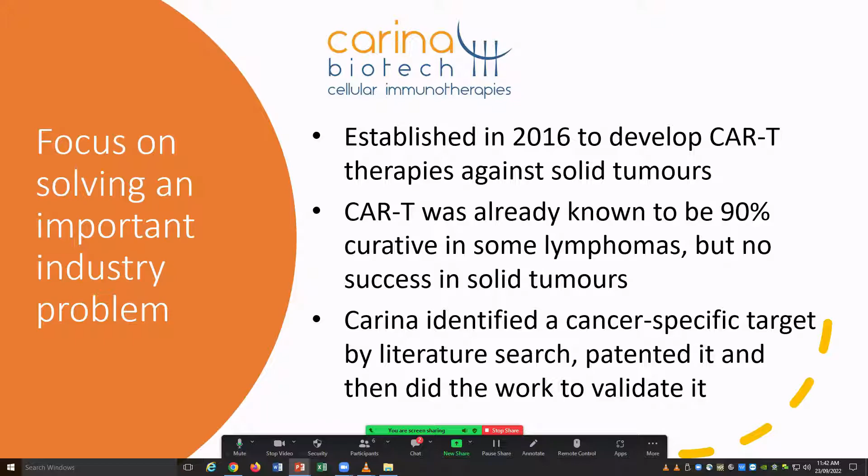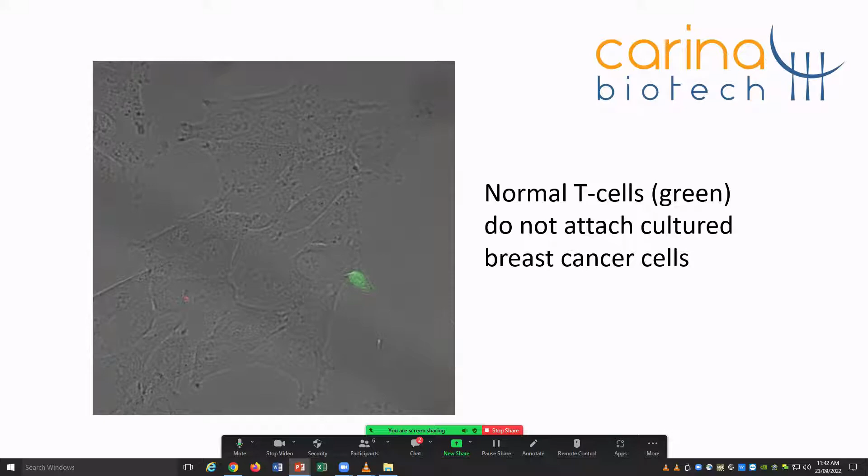What we then did was to genetically modify the same T cells from the same patient to recognise something on that cancer cell that it could target. And this is the effect you get. You start to see the T cells say, hey, something good's going on here, and they all start gathering in. Then you'll see a lot of red appearing because there's a dye in there that turns cells red when they die. So that cancer cell in the background is progressively being destroyed - you'll see it disappearing and going into dead clumps. Within minutes, this CAR T cell was recognising and killing the cancer cells.

We've gone on since then very successfully, and this is solid tumours in mouse, not on a tissue culture dish, implanted with a tumour. UT is untreated, the line going up the top, so the cancer grows - it's a breast cancer, grows very rapidly - whereas the bottom line is mice with the same tumour injected with our immune therapy CAR T cells, and you can see it just totally destroys the cancer. We're about to get, we hope, FDA approval to start a clinical trial on this. It's a real buzz to develop this technology and now be going into humans, and we hope being one of the pioneers of curing cancer, solid tumours, with CAR T cells.

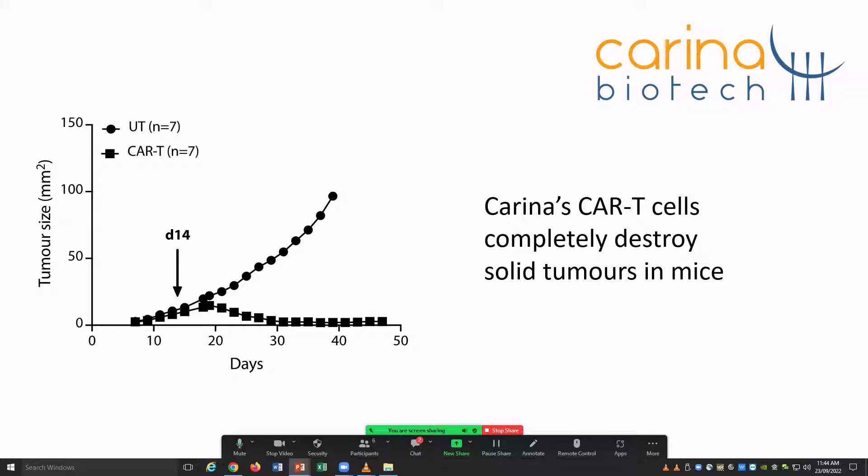But the bottom line was, the reason I said this, is that we did it the other way around. We said, that's the problem - you've got to find something specific for solid tumours. Let's develop something, patent it, because you have to have patents in this field or else you have no competitive position. And it's looking very promising.

So a second learning is that you can't do it alone, and I think you've heard that story from Stephen very strongly already. There's a lot of expertise that's needed there - there's no way you can do this with a little company focusing entirely internally. But it's difficult for a small company because you haven't got much money, you can't go out and appoint everybody that you need to be appointed.

So what we've done, both companies, is get a very strong independent board that really understands where we're headed, and has all the networks internationally that we can go with, and also advisors and partners to work with internationally, because this thing is not an Australian problem - Australia is a very small market for this sort of thing. And in both cases, we've got some industry leaders who have come on board and really been helpful.

Mike Jensen, for example, is really one of the pioneers - he was one of the inventors of that immune therapy for lymphoma that I mentioned to start with. We thought, oh, it'd be nice to approach him, and then thought, oh no, he'll just think we're a two-bit little company in Australia, he'll just tell us where to go. But we went along to him, and he's so generous - he's a paediatrician, they're always nice people - and he's really helped us along the journey really solidly. So don't be afraid to knock on doors, even though you think they won't listen to me. Some won't, some will be so-and-sos, but a lot of people will really help you out.

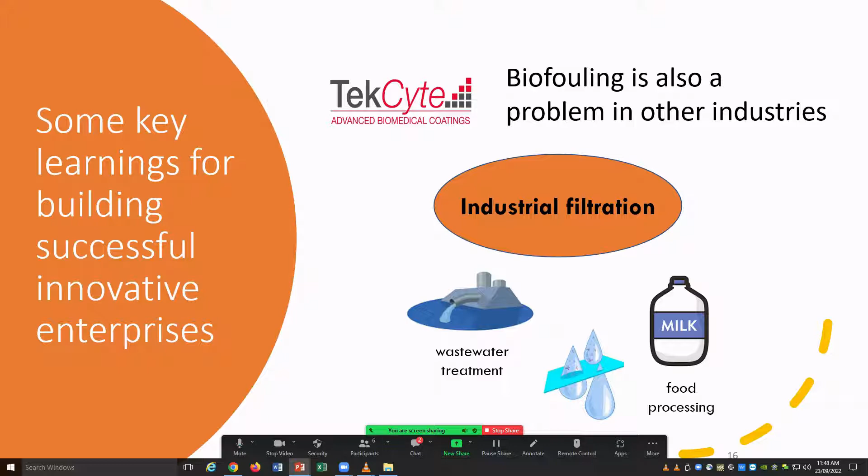And we're developing this nicely in this market. However, what we recently thought was, well, where else is biofouling a problem? One of the big areas, which may end up being the real success for the company, is the industrial filtration area - be it treating wastewater, food processing, and so forth. Desal plants, for example, all use membranes which get particles building up on them and cause real problems, and we're just getting some very good early results with that. So for all we know, TekCyte, which is a medical device company, could well end up being an industrial filtration company in its success - just thinking outside the square, where else can we apply this?

And then finally, how do you get money for all this stuff? That's a real toughie. Usually when companies first start up, there's a little bit of money from, as it's often said, the 3 Fs: friends, family and fools. But then you get to the point where you need a bit more, and unfortunately, venture capital is not always the answer.

That's the sort of big money, and you certainly need that if you're going to go. Carina, for example, is just finishing a raising for about 8 million. Next one, it'll burn that within the year when going into clinical trials. Next raising is going to be 25 million, so it's not trivial money. Unfortunately, Australia is not very good at this. We don't really have that depth of funding, so we're probably going to go to the US for that.

But the first one might not be the right one, and venture capital is not for companies that are not really high growth, for example. So it may be tempting to take money from the first one that comes along, but it's not always the right decision to make.

So I will conclude there, with a statement, as I said at the start: science training gives you all that problem solving, thinking outside the square, innovation. You can apply it to anything you choose to do. And I wish you the very best for your careers. Thank you.